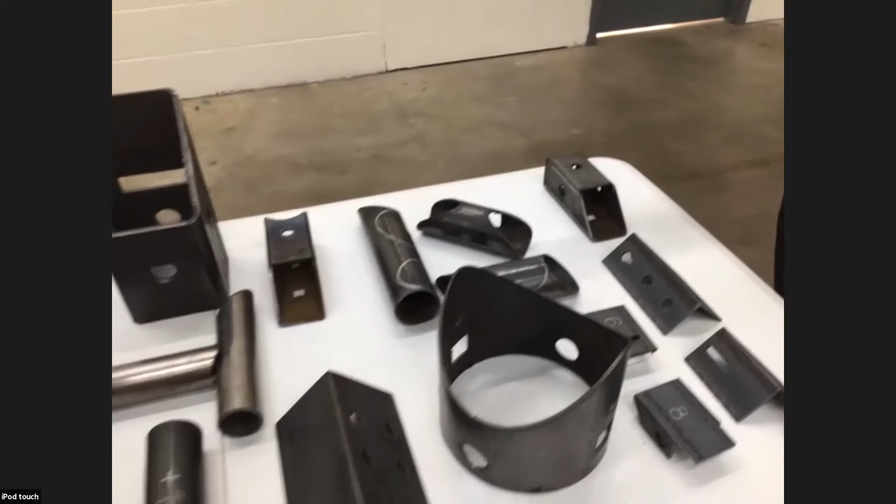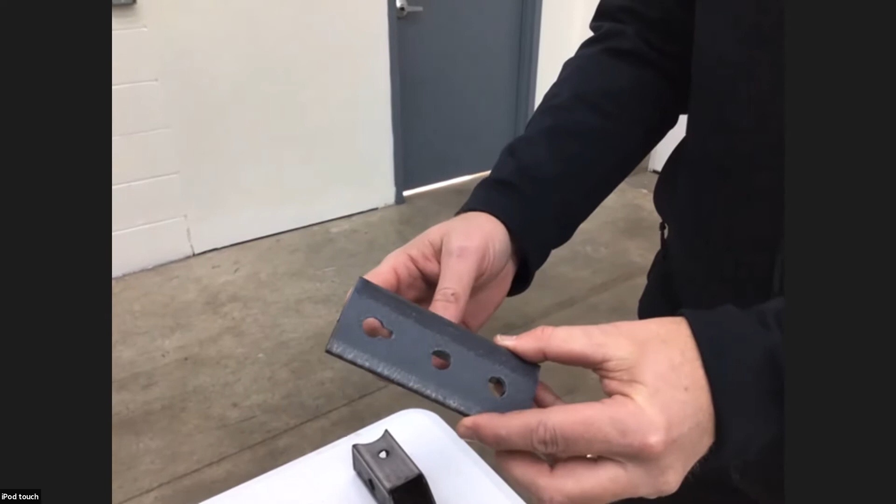So certainly the sizes, like Bill mentioned, we can do square, round, rectangle. You can see here if you need to cut slots, holes, miters, copes, all that's possible on the Dragon. Not a problem to be able to do. We've recently, a year ago, added angle and channel capabilities. So on the angle and channel, you can do any angle and channel that is going to be 4x4. It can fit into a 4x4 box, I guess, is the easiest way to put it.

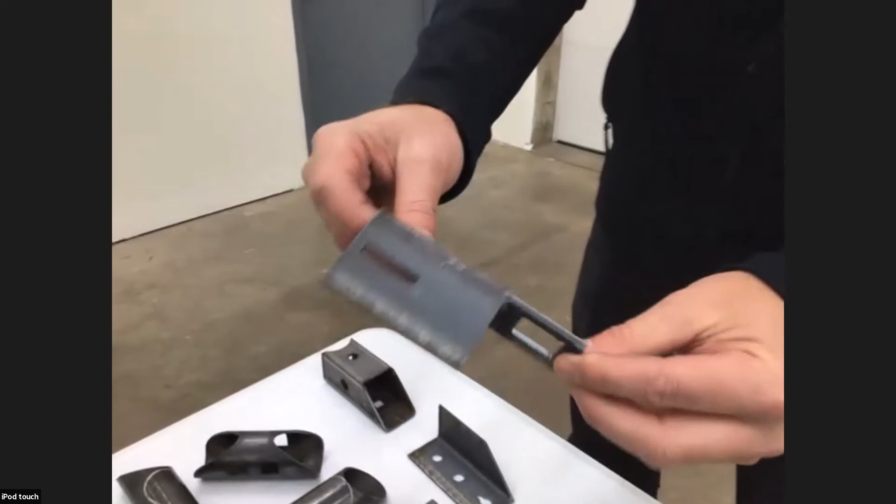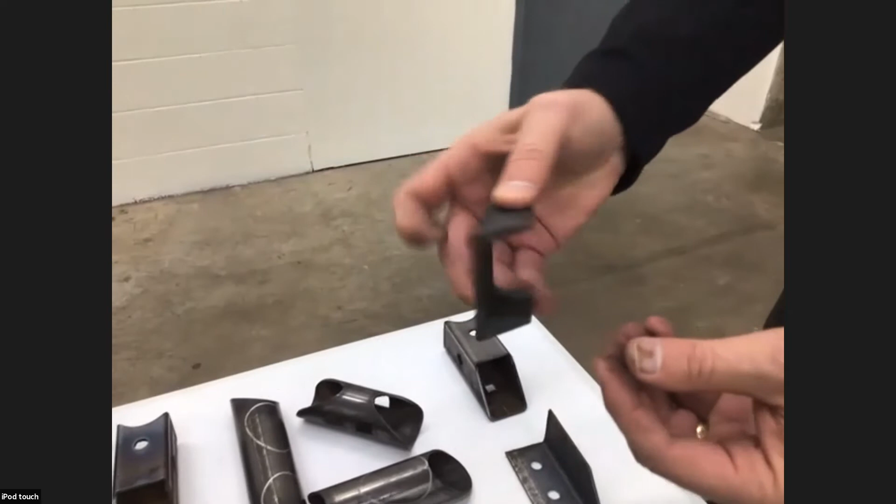So you can cut angles, again, holes, slots, a couple different examples here of what we've done on our Dragon machine here. Here's an example of some channel that you can see. So again, any channel or angle that fits in a 4x4 box, we can process through the Dragon. On the round, we can go up to a 6-inch round and down to basically a 3/4 inch round are the parameters. So there again, you can see the plasma cutting on an example of a larger piece.

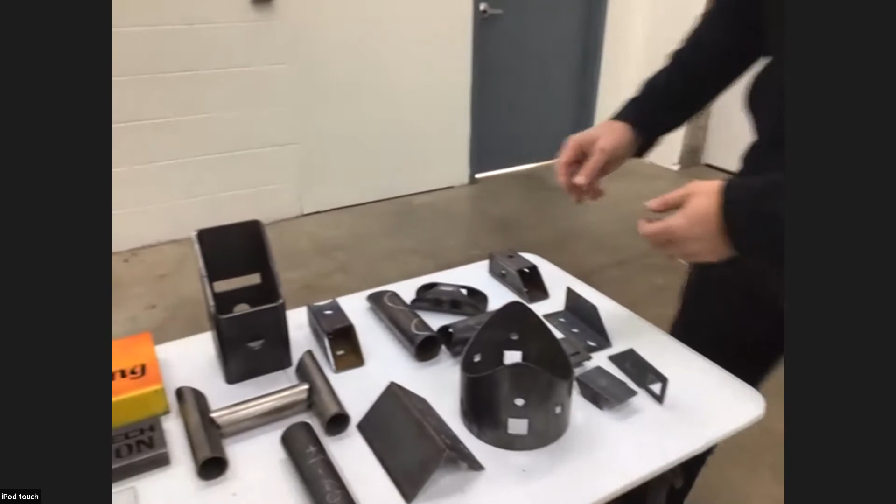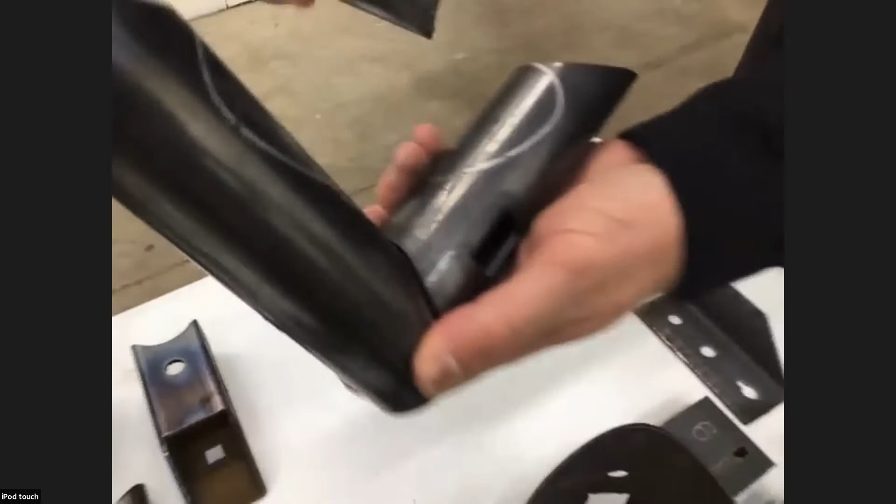One of the also neat features we do is we can draw the weldment fit-ups on a tube. So if you have an assembly and you want to know where that fits up, we've got a marker station and an engraver station. Either way, that allows you to put that together. So here's an example of if you had someone out there needing to weld this together, all those parts are nicely drawn out on where that fits up.

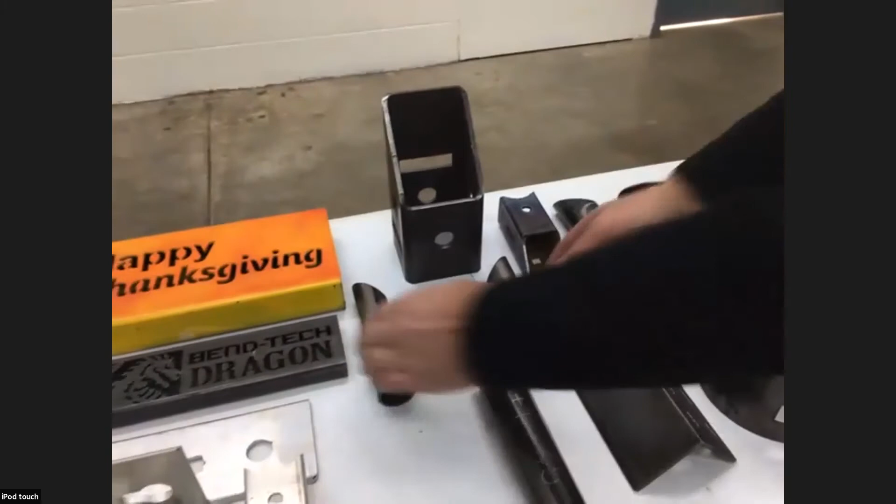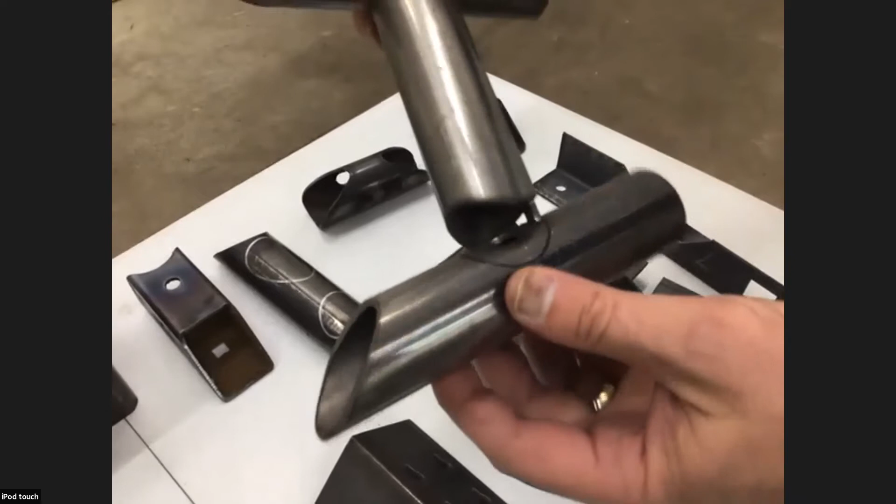And there's also something we do called slot and tab. So not only if you want to just mark, but say you want to really fixture in where that lands, we can do a tab and a slot. So your weld fitment then is just that easy. You put that together, you know exactly where everything should land. So it saves you a ton of time on the setup of these parts and pieces. And if you guys have put together handrail and other assemblies, you know what I'm talking about.

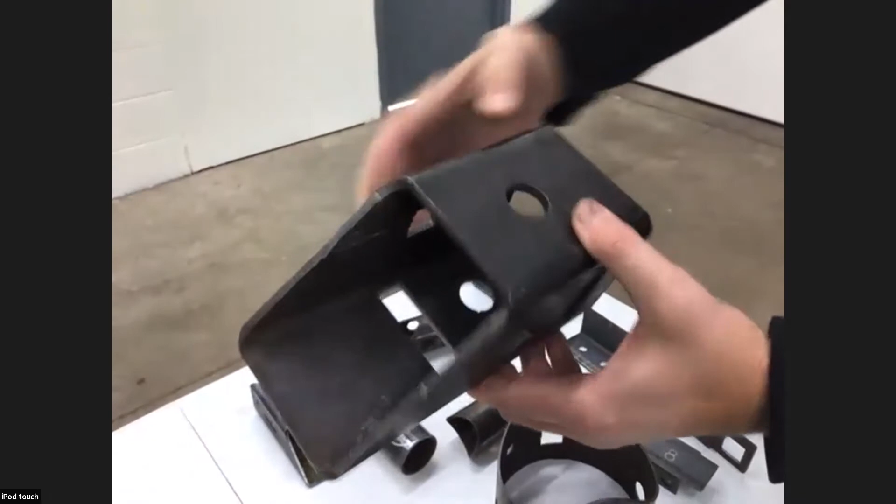Here's an example of some 4x4. So in our square, we can do up to 4x4 in material size. And again, miter cuts, holes, any kind of geometry you want to cut out, not a problem for the Dragon.

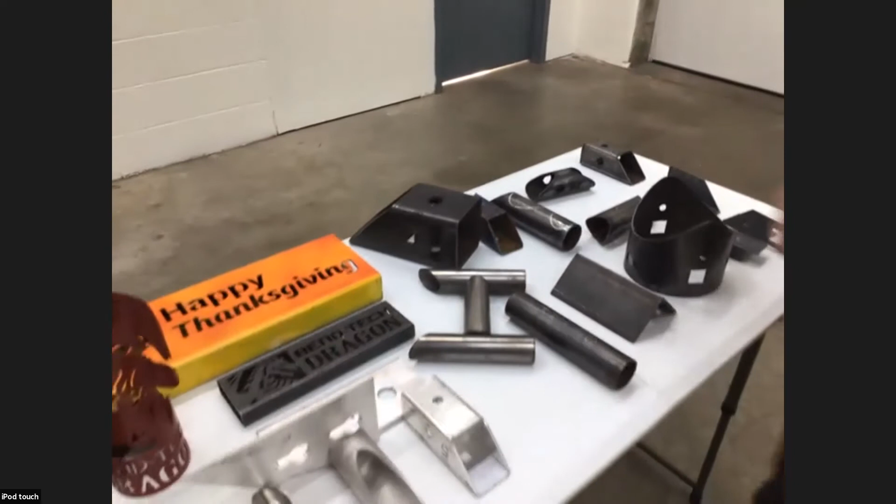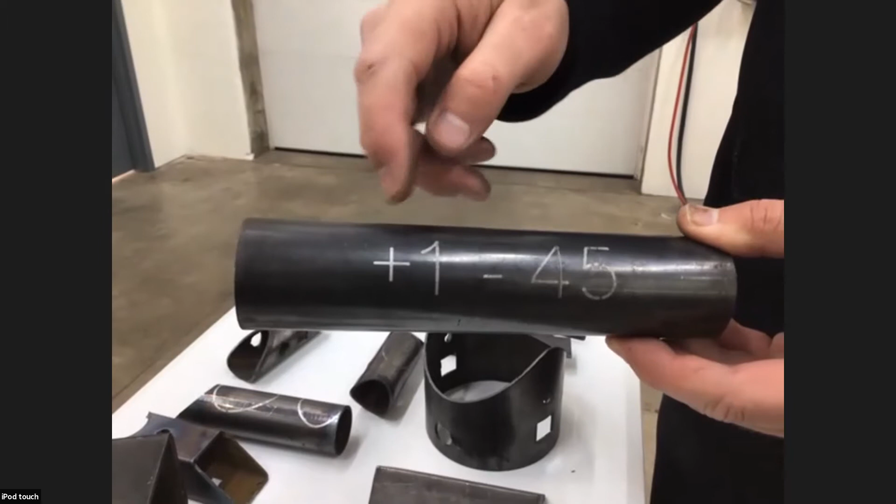We also, I want to talk about one thing we do. We've been doing tube software for over 20 years. And one thing we can do is calibrate to your bender. So if you're bending tube, you can bring a bent piece of tubing into our software, and then our machine can mark the bend location here and tell you bend 1 is 45 degrees, and can also calculate spring back.

So when you take a piece of tubing, you can get all the cutting done on it, holes, again, miters, copes. The operator then can take that piece of tubing, line it up in your bender, calibrate it exclusively to your bender, and go ahead and bend that piece of tubing. So that's something pretty unique to our machine compared to anything else in the marketplace.

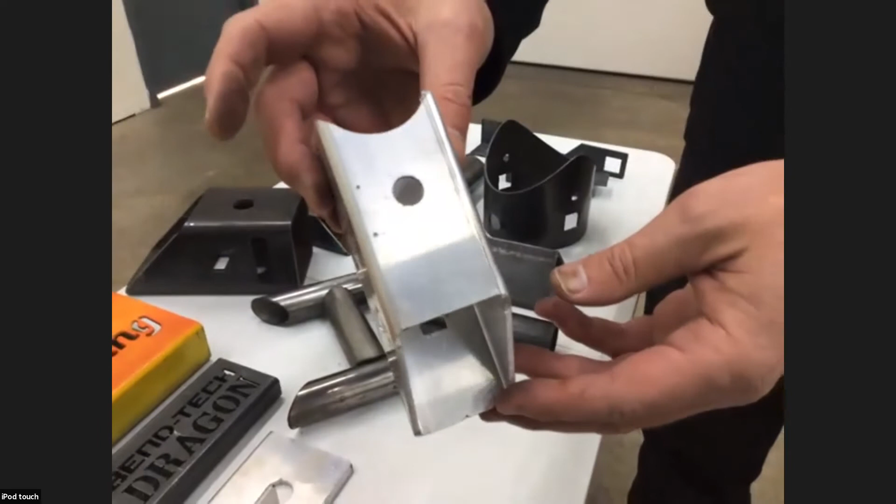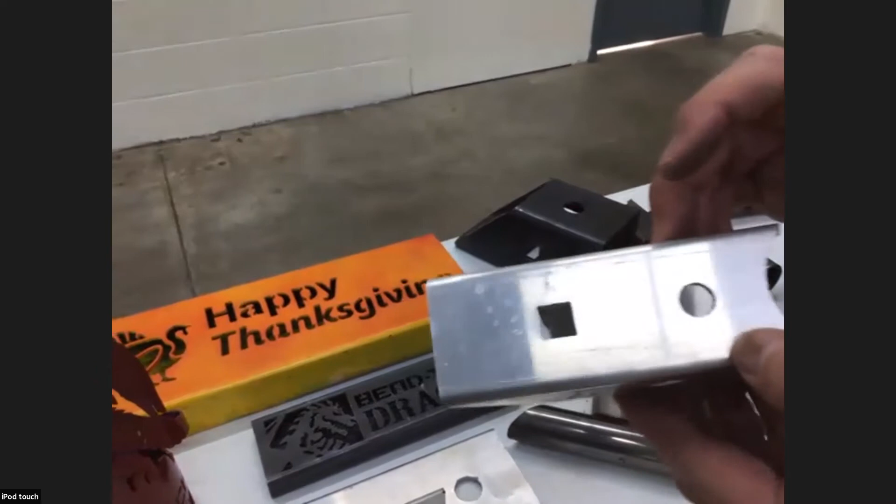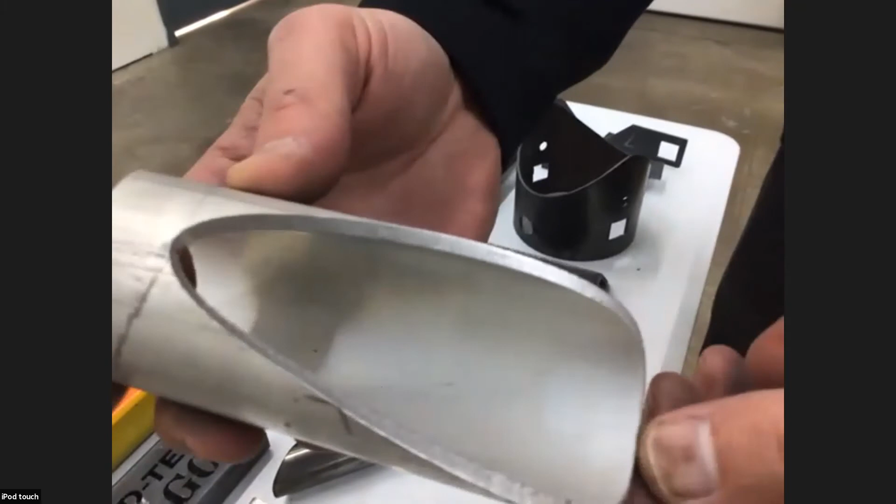We also can do some other things besides mild steel with our machine. We do have a coolant system, and this allows us to cut aluminum without it getting too hot, so you can get some nice cuts by running coolant through the tube, just recirculating it, and then being able to plasma cut, where if you didn't do that, you would just not get this nice edge. You'd have issues inside with dross, and it would not be very plasma friendly.

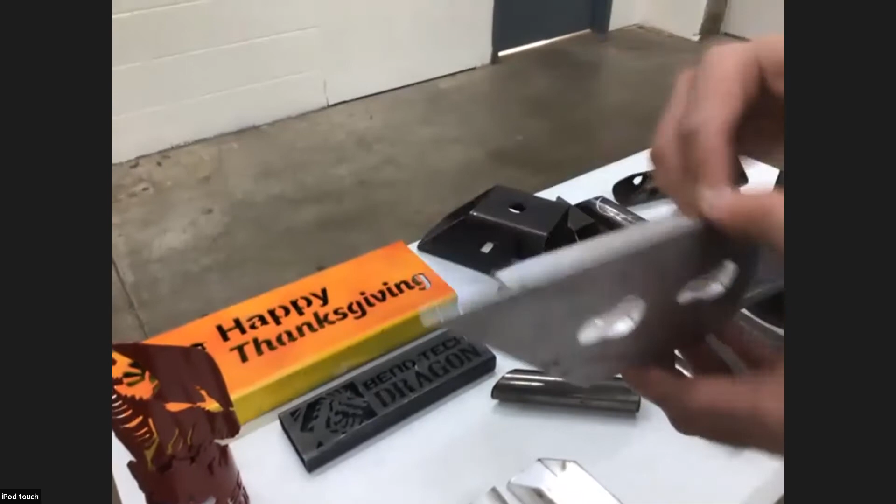Here's a piece of angle. Obviously, we don't use coolant for that, but the plasma is not hitting the backside, so that shows you some things on aluminum angle that we do.

And then another popular thing is stainless. So again, with running a coolant through stainless, we're able to plasma cut that and get a very nice result. You're still going to get a little bit of a plasma edge. If you run nitrogen, that does help that as well. But we do have quite a few Dragon customers cutting stainless.

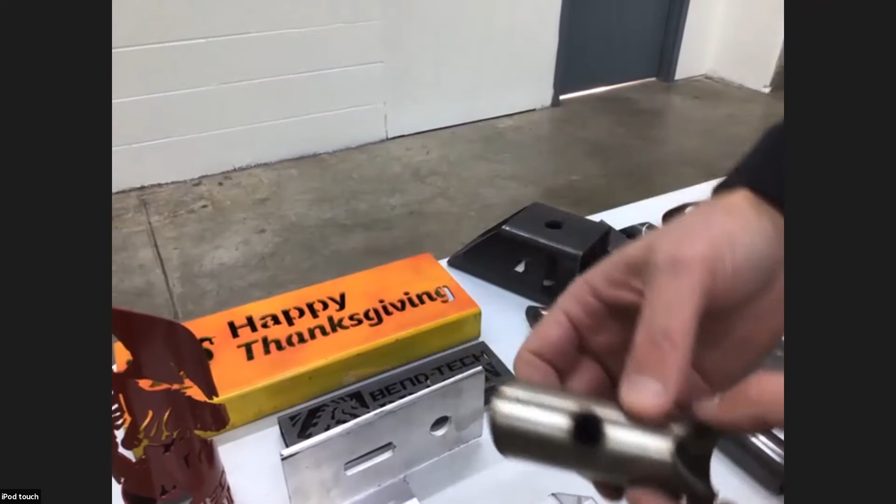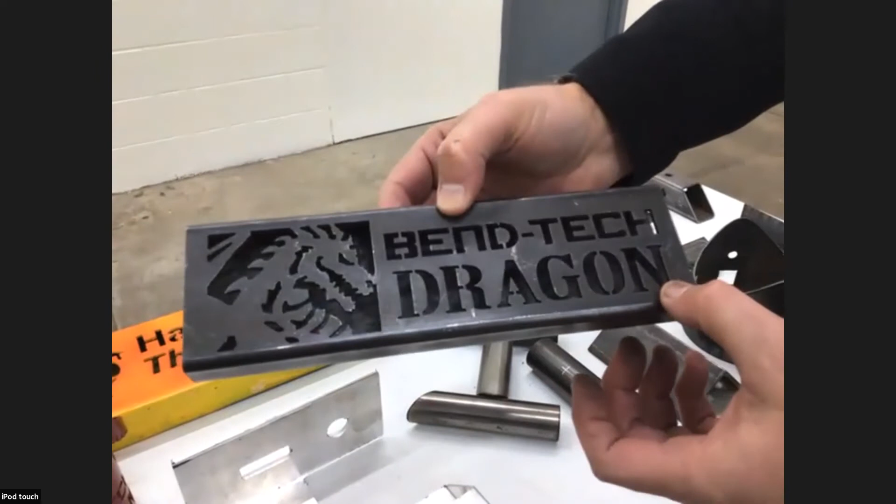And then for fun, we do have a marketing department that likes to have a little fun once in a while. So you can take a DXF design and cut this out with our Dragon machine. So we've done some different examples here. We've cut a tube and unfolded it, which is kind of a fun piece we take to trade shows.

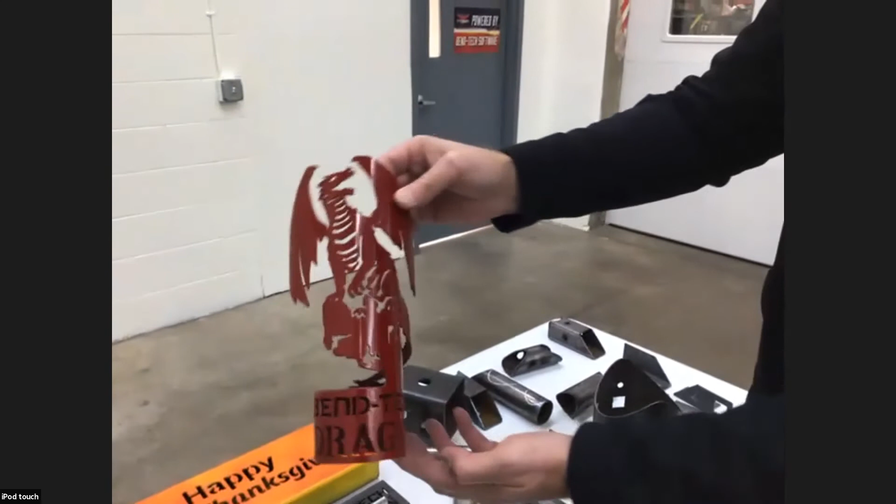And because it's soon to be Thanksgiving, we thought we'd show you, happy Thanksgiving to everybody a little bit early. This was all cut out on the Dragon machine as well. So that kind of gives you an idea of what we can process with the machine.

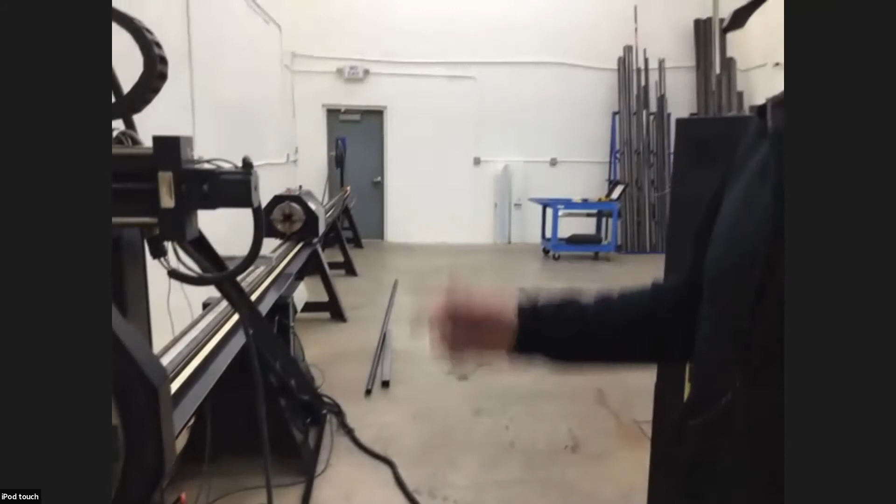What I'd like to do is go over the machine, kind of show you the components, how it works, and talk a little bit about that. So in our shop here, we have a water tray system set up. This is for our coolant system, and there's 3 5-foot trays that go out. So if you have longer parts, it's going to capture the water, come down into a sump, and then go back to a hose reel that's retractable, and that's your system of recirculating water through the piece if you want to use the water system.

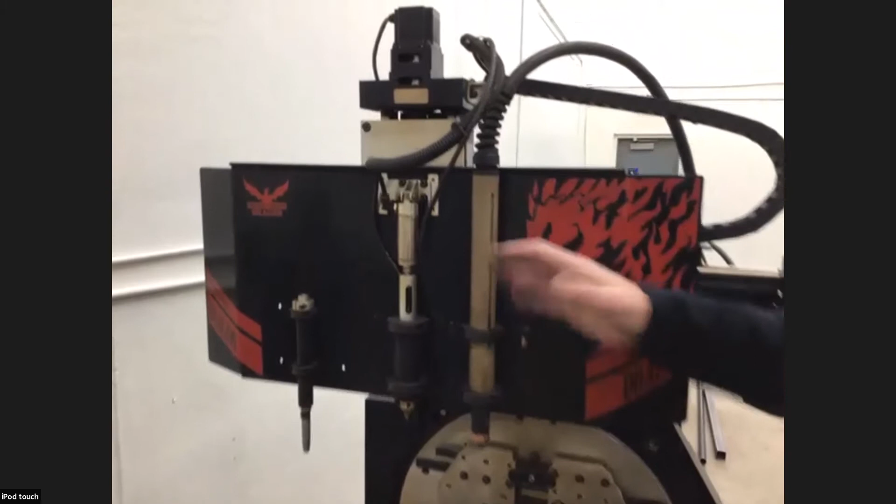But let's talk about our head. We have Thomson actuators that go up and down, left and right, and we have, again, a marker station. So you can put a marker in here, again, mark bend locations, part numbers. We also have an air engraver here, and this allows you to mark the tube however you need. If you want part names, numbers, or bend locations, just another way to mark.

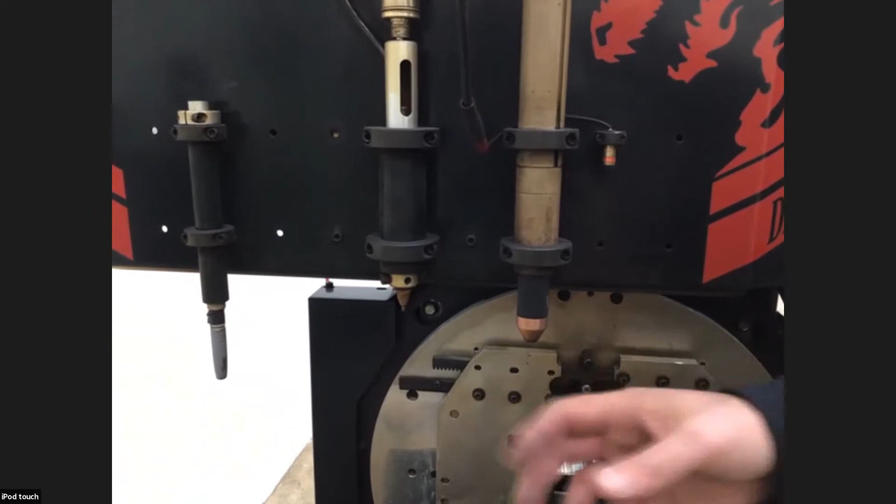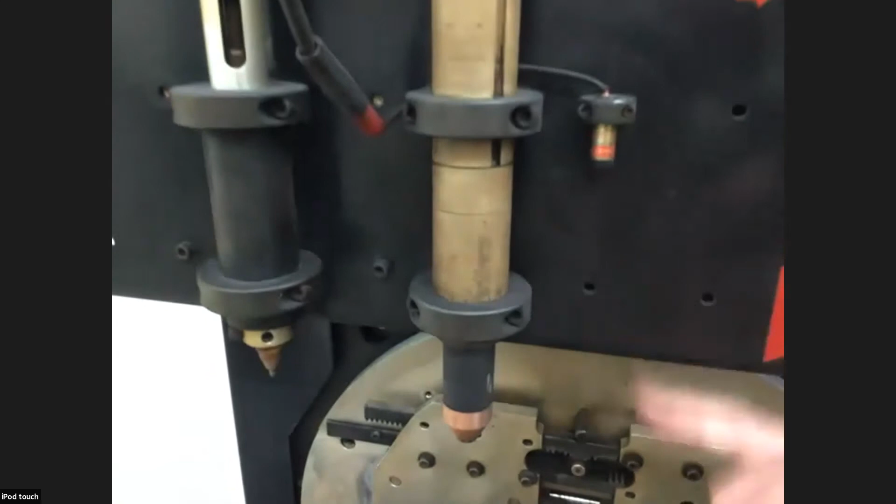Of course, we have our mechanized plasma torch here. We do recommend Hypertherm, but any mechanized plasma torch will work with our system, and we can provide a Hypertherm. Typically, we would recommend for an average steel shop probably a PowerMax 65. If you're doing some heavier duty stainless or aluminum, you may want to jump to an 85, but the 65 is kind of our workhorse. And then we also have a little laser lineup light here, and this allows the operator to see where the end of the tube needs to be when they load the tube up.

So our front gate here, we'll talk just a minute about this. This is 2 sets of rollers here, left and right and up and down. And the operator, when they change material, just needs to change it 1 time per size of material. And our rollers can accommodate all those different types of tubing and angle and channel that we showed you on here.

The angle and channel upgrade to the machine is actually a gear here and a motor, and this actually rotates the gate with the chuck as the material is being processed through. And that eliminates any spring that an angle or channel might have compared to a tube. So that is one of the machine differences. Our standard machine that does square, round, and rectangle does not have a motorized gate. So just wanted to point that out.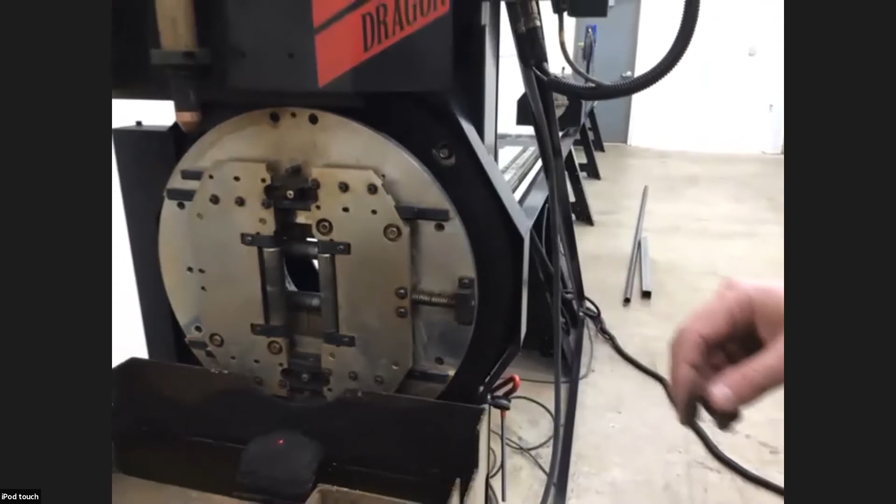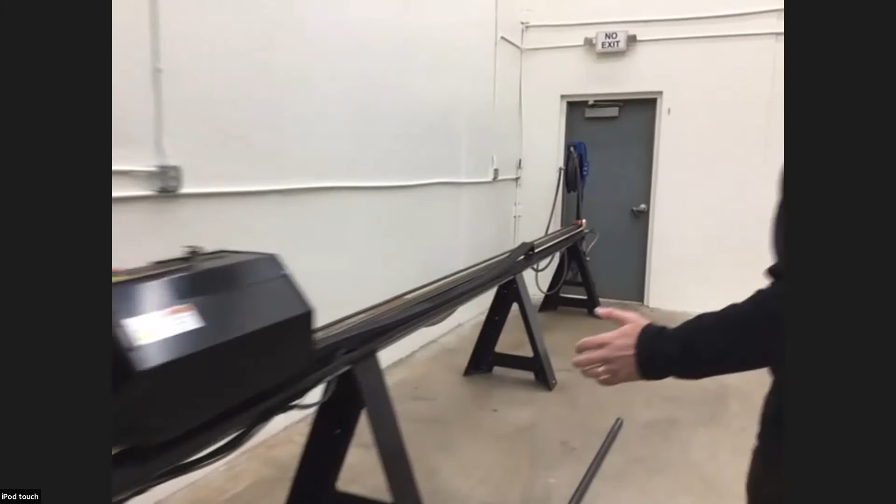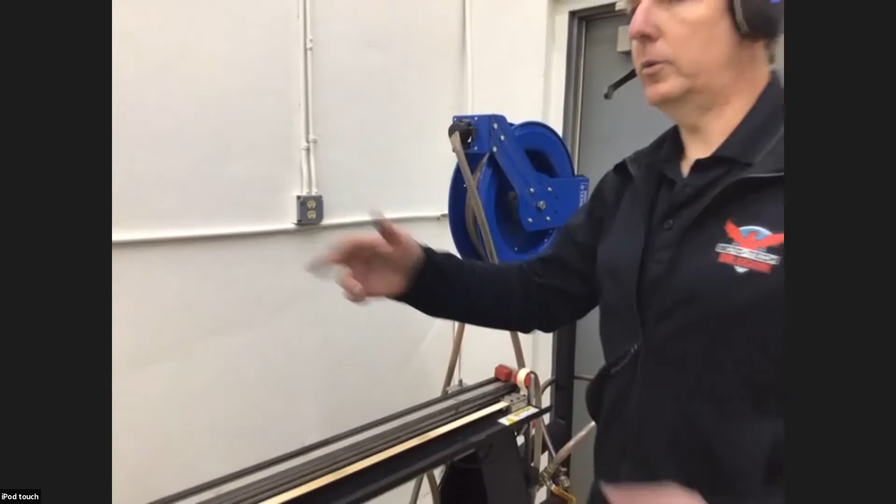So that's basically the head of the machine. We'll take you to the back here. The machine is a full 24-foot bed length, so you can put a full 24-foot tube on the machine and load it up. This is our hose reel. Again, if you use the water system, this is just a retractable system that's going to go into a plug in the end of the tube, and you're just recirculating the water through the machine.

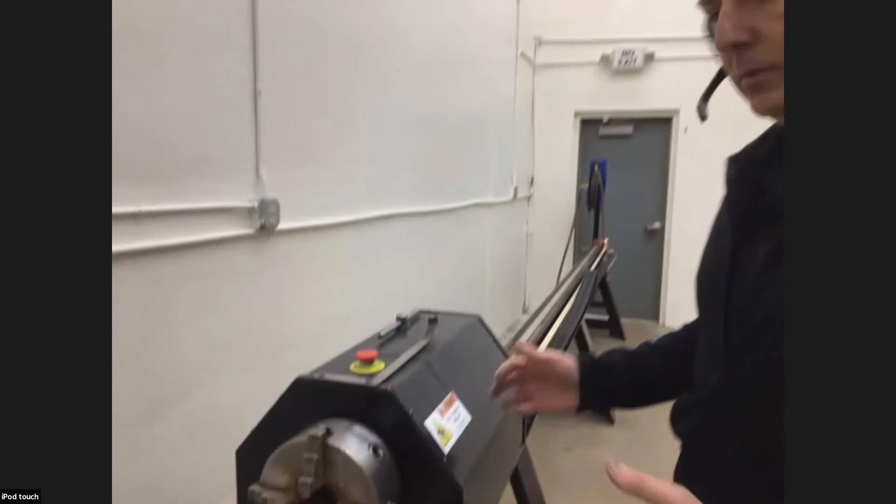If we come up here to the chuck trolley, what we have here is a 4-jaw chuck, and this allows you again to chuck in any of those materials as the operator needs to load it. This is a belt drive system to move the material in and out as it's being processed. And again, this is a full CNC run through our Dragon software. We have our control box down here that is manufactured by us.

One of the things I want to point out, this is completely made in the US, including our software, which we've done for 20 years. So everything gets assembled here, put together, calibrated, and then shipped to our customers.

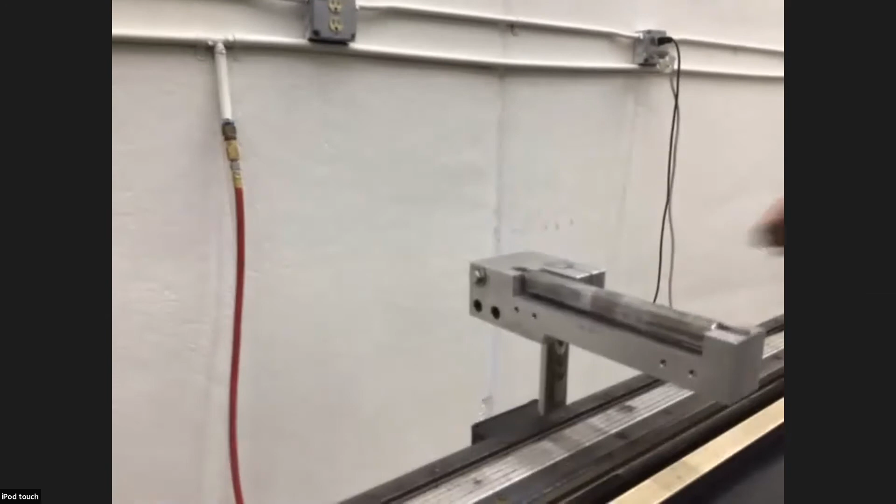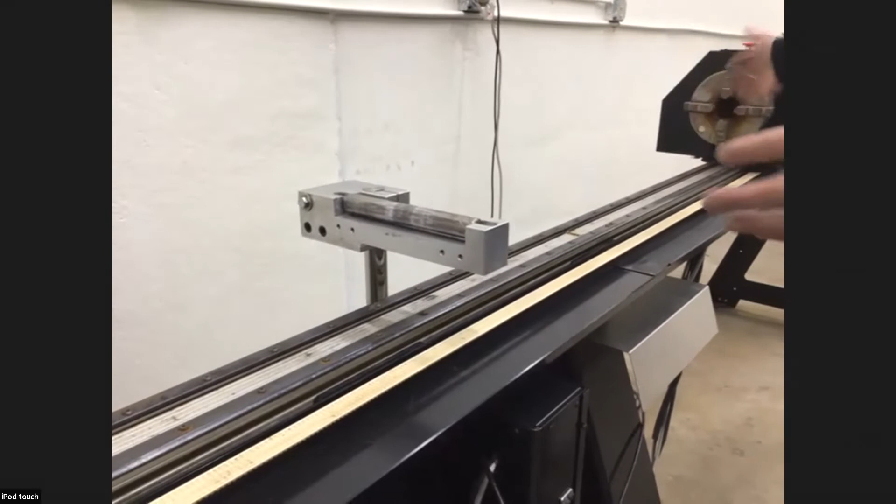Right here, we have a lifter station about 6 feet back from the head of the machine. So if you do have a full 24-foot stick, and maybe it's thinner wall, so it's going to sag a little bit from the chuck to the front gate, this lifter station will come up to the correct height. The operator then will load the material, and this keeps the material going straight through the gate to make sure our cuts are as accurate as possible. We can hold a plus or minus 10 thousandths on our machine when everything is dialed in.

Now, if you're processing square or rectangle, this lifter is going to go up and down as that gets rotated to follow the material. Obviously, with round, it's just going to stay there. When the chuck trolley comes close enough, it's going to automatically swing out of the way, and you'll finish processing your tubes on that. That's basically it for the machine.

What I'd like to do is hand this over to my tech, Jared, who will be screen sharing the BendTech software, and we will go through a little bit of our software capabilities. When you buy a machine, you get a full software package. You can draw in BendTech. You can import CAD files into BendTech. We do have a direct interface with Tekla and SDS2. And any other CAD, we can bring in step models, so we can bring in single parts or assemblies into our software.

And then we also have a great feature: you can design a single part or assembly in BendTech. So Jared's going to show you a couple of the things in our software, walk you through how easy it is getting the part nested. We're actually going to load a piece of material, cut a sample for you guys, and then go from there. So Jared, I will have you take it over on the software side.

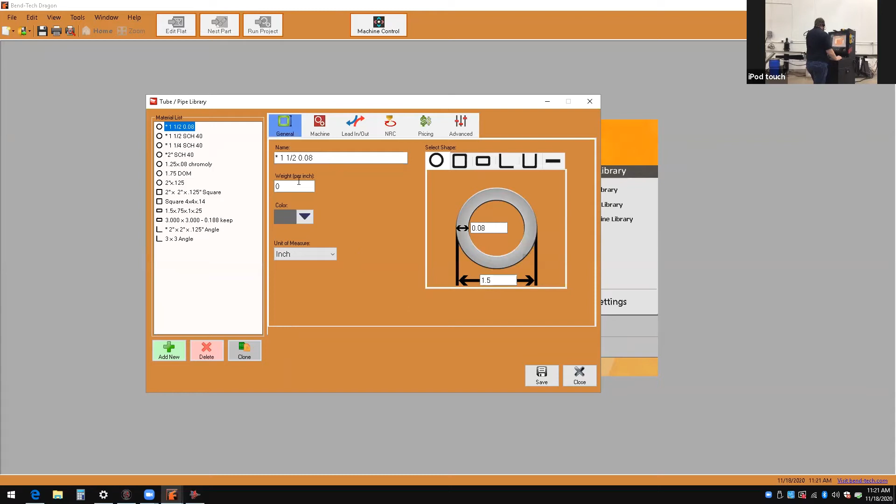You'll essentially create your material library from anything that you use frequently or anything that you have on hand. Other than the name, the only requirements are your material wall thickness and the OD of material. And then it has other settings such as the pierce height and your cutting height. And it also has your feed rate of how fast you're going to move with the machine. So once you have your materials set up, I'll just show you the straight part here.

So right here would be a part name, if you have a number that you're applying to a part or anything like that. So I'll just go with P23. And then right here you're looking at your tube length, so that's meaning the length of the part that you're actually trying to cut. So I'll go with 6 inches for that.

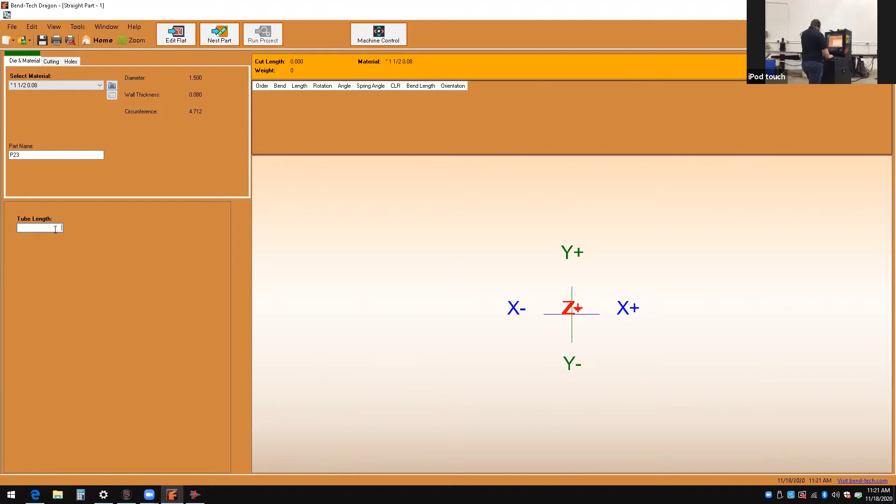The second tab up here is going to be cutting. That's meaning any end cuts that it's applying. So if I hit add the first time, it's going to automatically do a cope. Second time, it'll do the same to the opposite end. So I have a cope set to 90 degrees on either end of this material. To change any of that, like between cope and notch, I can select that and go back and forth between a cope and a miter. And then same with the other here.

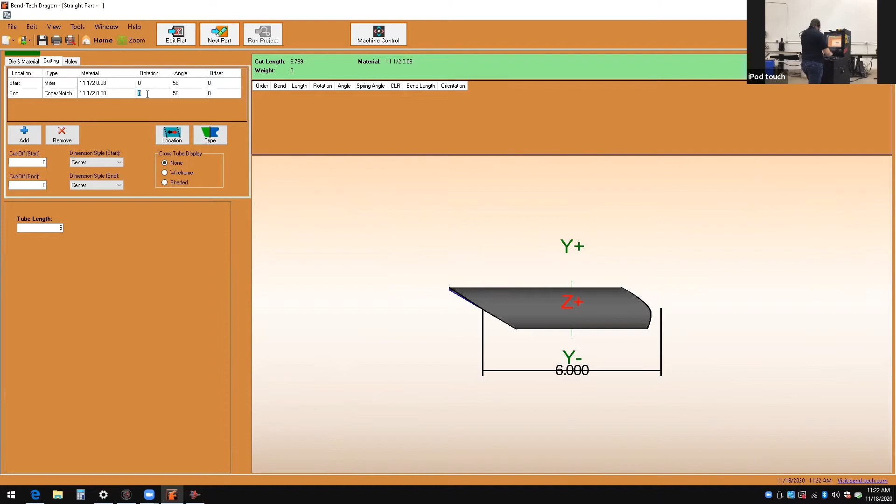If I want to change the rotation, I can click on that and say I need a 58-degree angle rather than a 30-degree or a 90-degree angle. Same with the copes. If it's not in the correct rotation, I would change that and say this needs to be 180 degrees rotated from the other, and that would be the cope on either end 58 degrees. If I want to view that, I can click on this wireframe or this shaded display, and that'll show me the actual fit up of those pieces.

The dimension style that we use as a default is to centerline. So centerline of whatever adjoining piece that you're using; you have the ability to change that right here. So you can go between center, you can do inside of cut or outside of cut. So overall part length or center line or inside of cut length, so not including the copes. And that's purely based on whatever the shop uses as their dimension style for their prints.

If it's the case where the ends are not coping to the same size material, I can go up here to this material drop down and choose a different size. So if my 1.5 inches was going to cope to 1.25 inches rather than 1.5 inches, I can change that so that it fits that material that it's coping to rather than coping to the exact size that you're using. And you also have the ability to do a custom profile as well. So if it's a material that you don't have in your material library, you would just set those material parameters, and then you would be able to cut out that piece against the other size that you're using.

The offset is just for cuts that are not on center. So if I take one of these and move them off center 1/2 inch, it'll be an off-centered cope rather than on center.

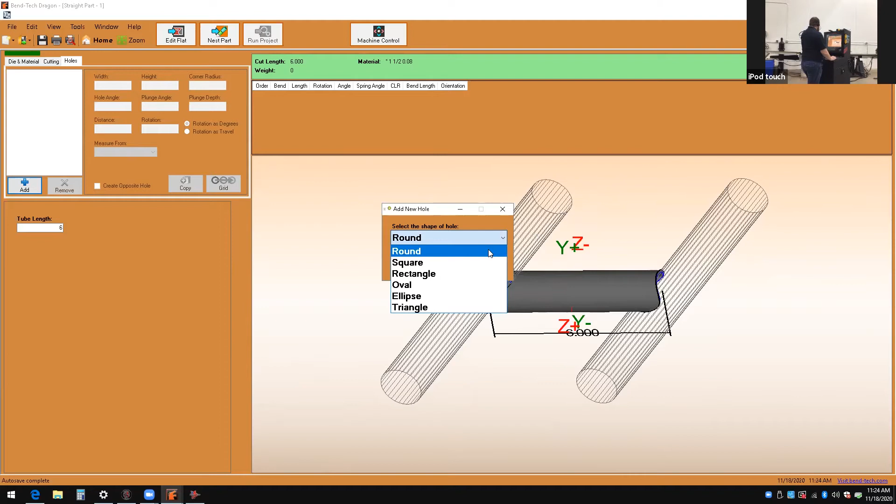Go back there. So the third tab here is going to be your holes. If I hit add, it's going to ask you what shape of hole that you want to do. We have the ability to do a round, square, rectangle, oval, ellipse, and triangle hole. So it's up to you on which hole shape that you want to use. So I'll start with a round hole. Up here you have the width of the hole, so that's going to be your OD, the diameter of your hole, so 1/2 inch. The distance is going to be from your black dimension line that you're seeing here. So to actually contact material, I'm going to go to 1.5 inches.

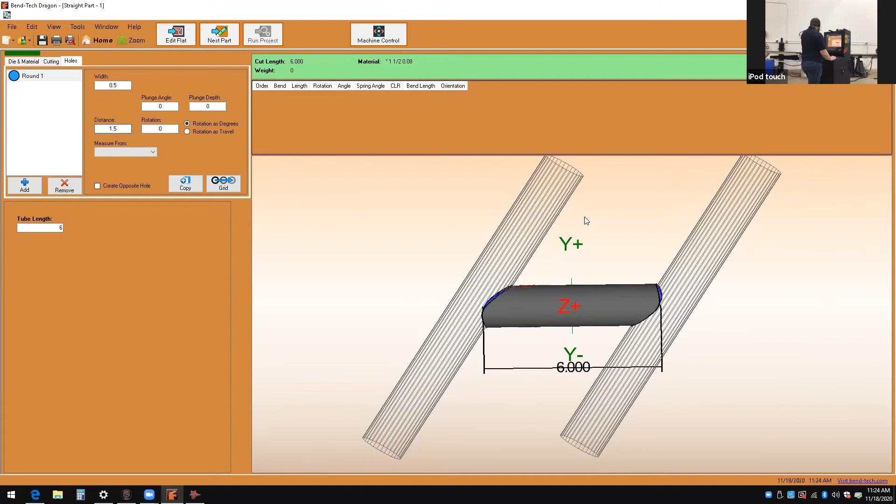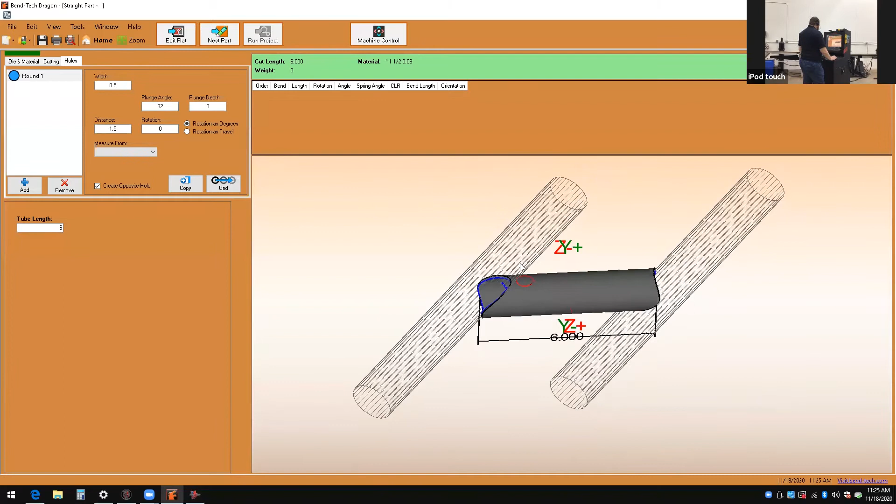And then right here I have a create opposite hole. What that does is it creates a hole 180 degrees from the original. That's an identical hole. If that came in at an angle, the same as my copes are going, I'd go with 32 degrees. And now that's not only going to elongate the one hole so that I would have clearance for a picket or something like that, but it's also going to offset this hole here so that they're not directly below each other, so they're at the same angle as what those copes would be.

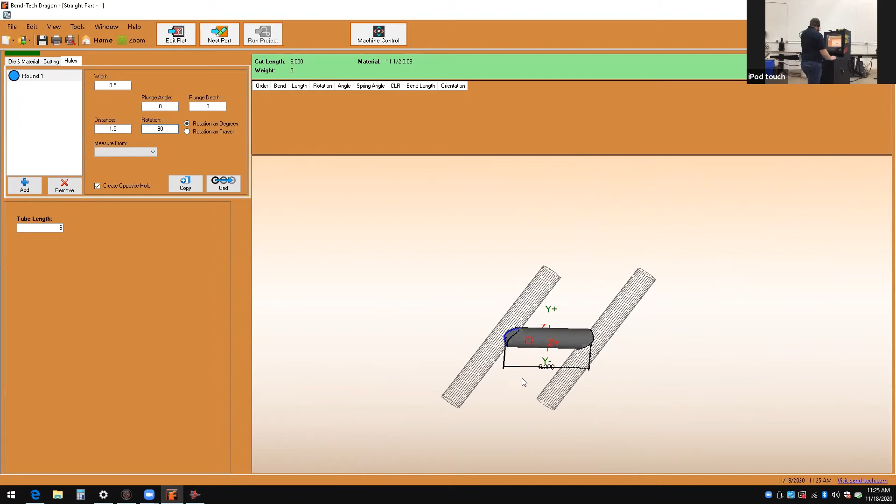And then you can rotate that around as well. So if I choose 90 degrees, it's going to end up on the other side of the material rather than the original side. Default is going to be to measure from the start of your part. You can change that to end of part as well if you'd rather. And then right here you have the ability to copy. So if you choose copy, it's going to be the identical hole.

All you need to change is where that distance from the start of your part or end of your part would be. And then the grid function is going to be how many holes that you're trying to create, and then what's the spacing in between those holes, and it'll go out and space those holes out so that you have that number of holes. So I'll add another hole here just so we have a few more.

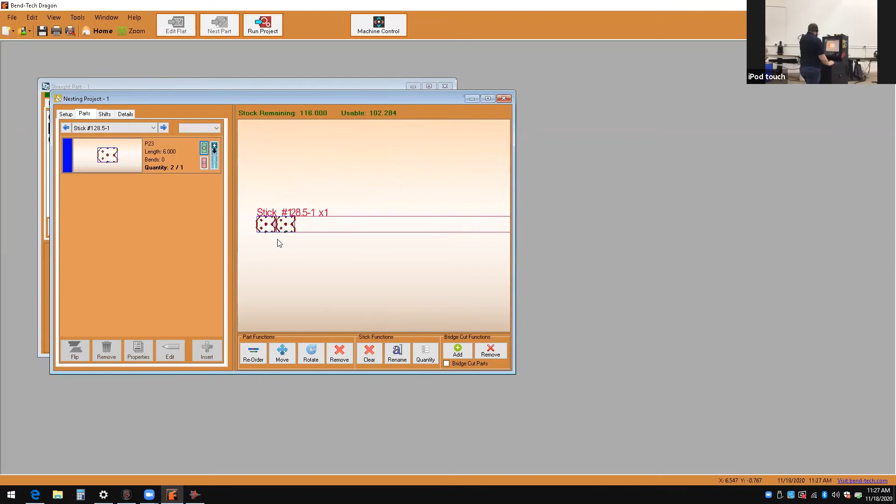So a couple different ways to nest in here. If I go in here, I have a button here that'll just ask you how many do you want to add. Hit enter, and it'll choose that number for you to continue. The blue here is going to be how many. It's going to fill up as many as possible on your stick of material, so that I can cut 17 out of the available material that I have. And then this subtract here is going to be how many do you want to get rid of, and it will take that many away as well.

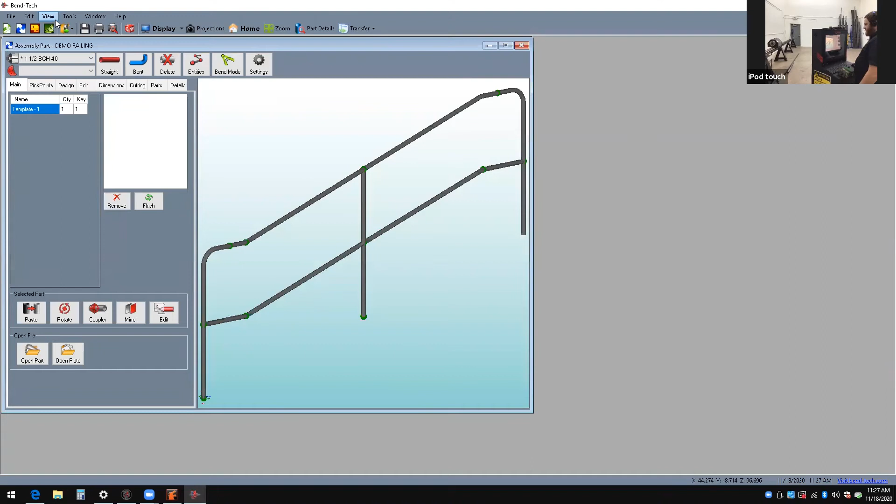So before we actually cut anything, I'm going to show you a couple other software functions. Let's see. So I'll show you the CAD program that we have. So we have a full CAD program as well with a bunch of different options of things that you're able to do. Assembly is the most common one. So that would be drawing of anything that you're trying to do, and it's in a 3D space. There's multiple different templates for things.

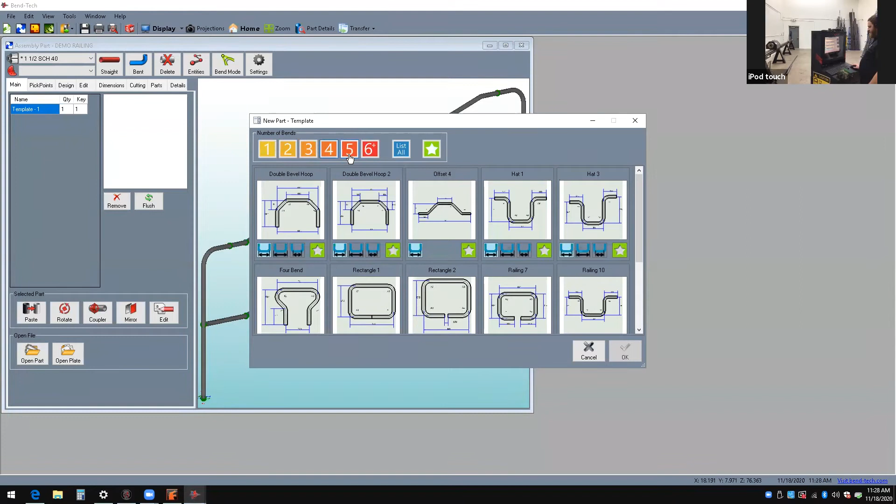So if I select this, this is going to be a number based off of how many bends are on that part, and I can choose between any of those and select what shape of part. So 5 and 6 are going to look similar to some of your handrail parts. 1 and 2 are going to be like small hoops and stuff like that. And then I can draw basically the same as what I did in the CAM side. I can draw individual parts in here. I can use XYZ coordinates as my drawing if that's your preference.

And then I have a couple other different template styles. So AP would be armor pack, which means any bumpers. It has tire carriers, roof racks, rock sliders, and stuff like that. So there are a few in here for like your Razors, or a couple for like a Maverick and stuff like that. The others would be just generic models, and you have the ability to change all of these to fit whatever you're trying to put it on. So you can change dimensions. Let me open one up here for you.

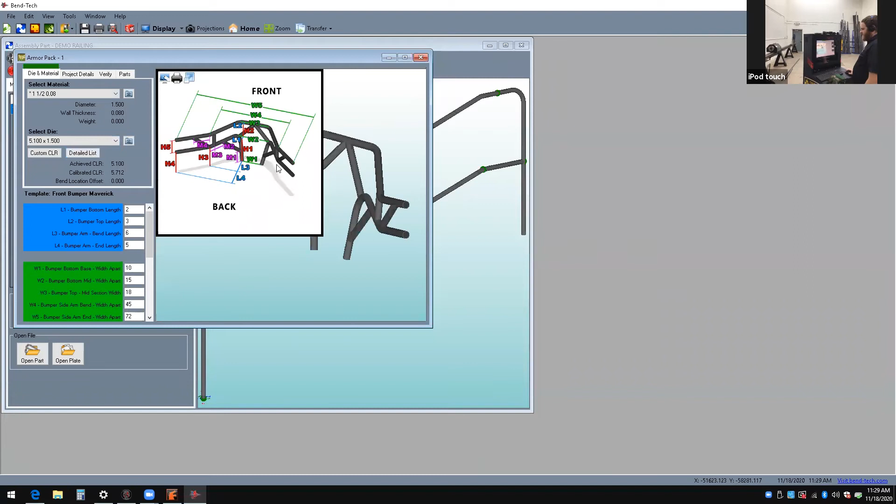So I'd choose material and die. And then right here, as you can see, I can change any of my dimensions to fit whatever I would be trying to put that on. So if it's not a Maverick, but you like the style of it or something like that, you could have the ability to change that and modify it to whatever vehicle. Close that.

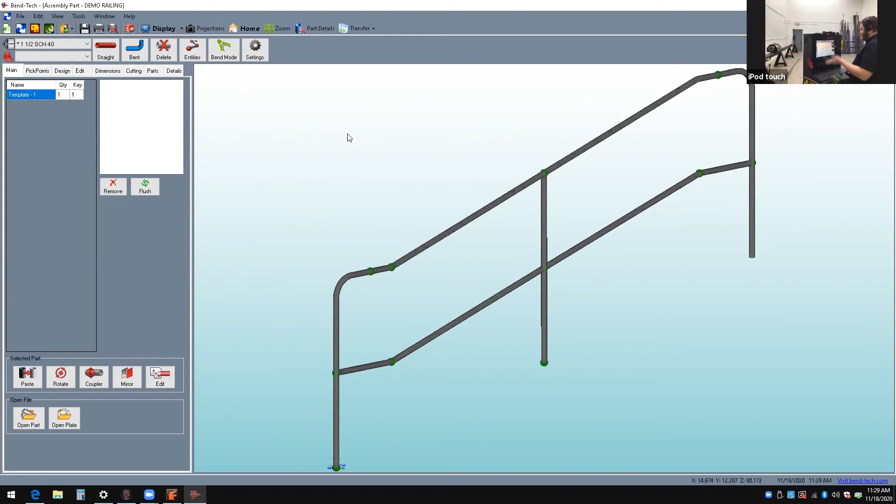Okay. So this is just an assembly that I drew quick. So I'll show you the transfer in between CAD and CAM. So once it's drawn, I would go to transfer and I would choose Dragon CAM. And then that's going to come up in my CAM side of the software. This is all the parts that are included in that. So I would go and nest that, and create a nest out of it. So I will go, as my default is a 240-inch stick.

The parts are all under this parts list. So you have your first, the main bar, and then your mid rails and your posts as well. So the other option for nesting is called auto nest. So if I set this to 0 and I hit that auto nest button, that's going to automatically apply all of those parts to my different lengths, and it's going to fill up the number of sticks that you need to cut it. So we need almost 2 full sticks to be able to cut out all those parts.

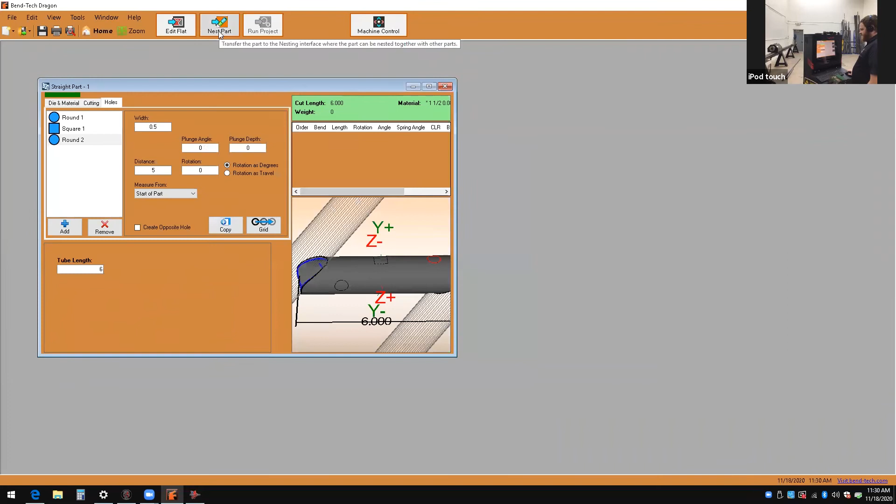So it's going to do that, and if you have too many, say you had 8 sticks listed in there but you only needed 2, it'll retract those to get rid of them, and you don't have to use the 6. So I'll go ahead and make this back into my nest, and then we'll go ahead and cut this out.

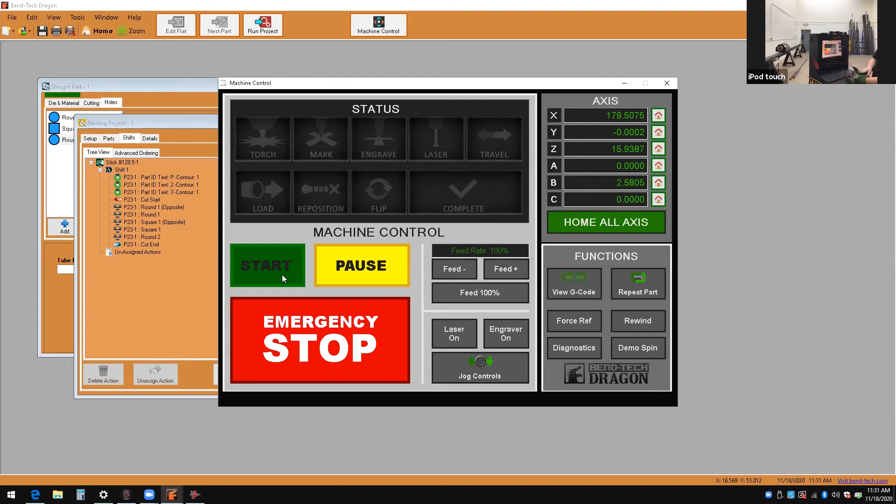And right here, I would just hit run project. That's going to come up with my machine control window. The first time I hit start, it's going to go to my load position. And then the second time you hit start, it continues and cuts that out. So let me stop sharing this quick. Be back. So I'll go ahead and load that piece of material.

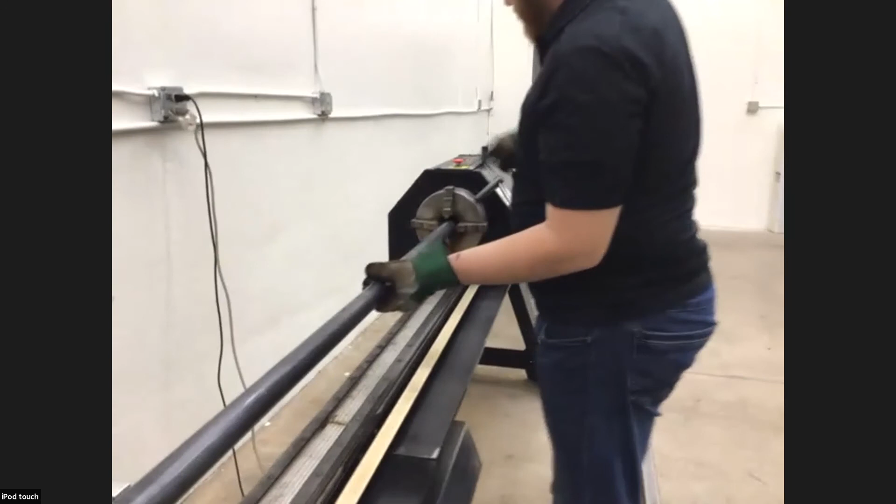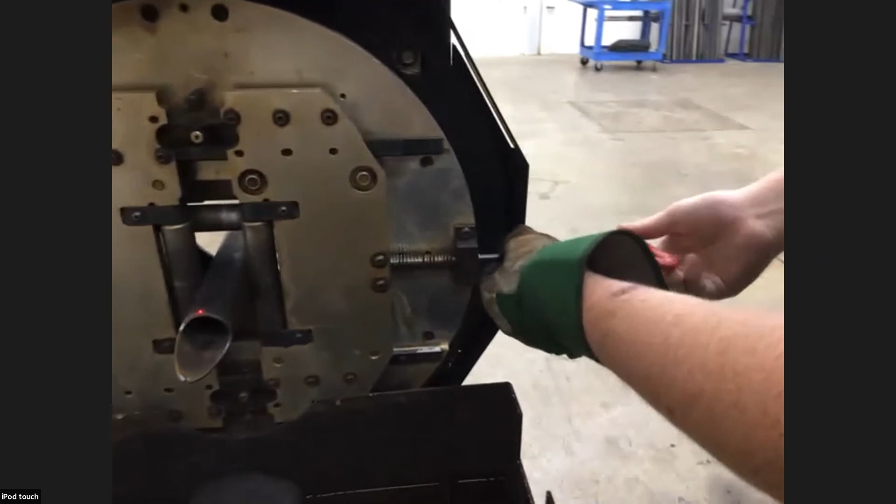So with that in there, you'll have to tighten up your gate as well. So that's just a 1/4 inch Allen hex head. Basically tighten it down until it's touching both sides of material and you're not trying to crank down or squeeze down on it too much.

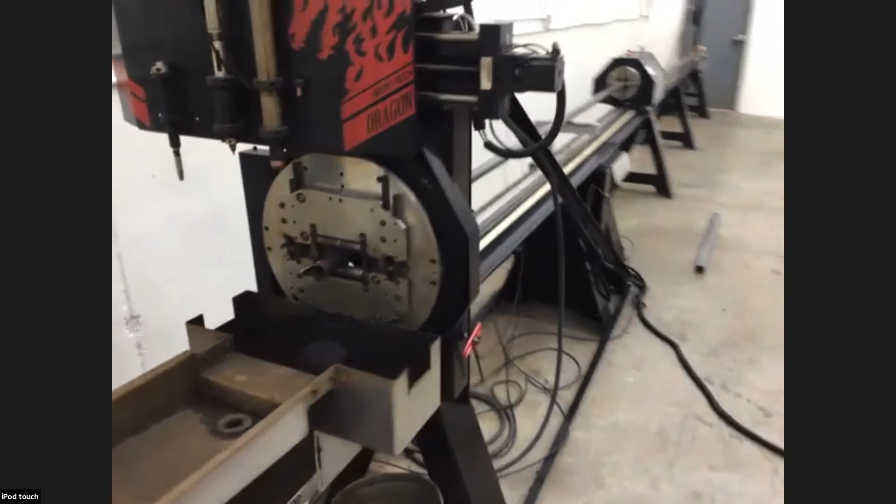Then in order to reach the other side, I need to rotate that. Like Ron said, there's only 2 sides, so I would close down on this one. And once you set a material, it's good until you need to change material size too, just to reiterate that. So, let me check the temperature real quick.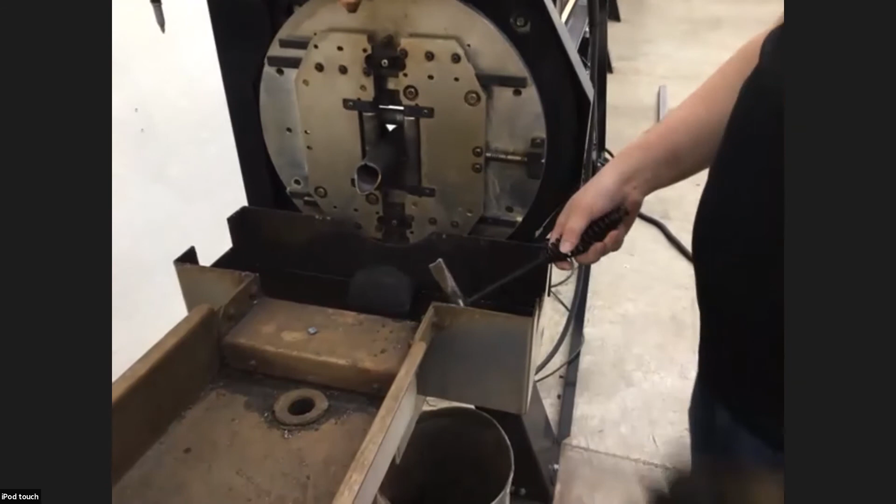And with the coolant system that you're using, you really don't have to worry about touching it. It's pretty cold to the touch when you're using that. Without that, we usually keep a little bit of water in the bottom of that bin so that parts can be cooled off.

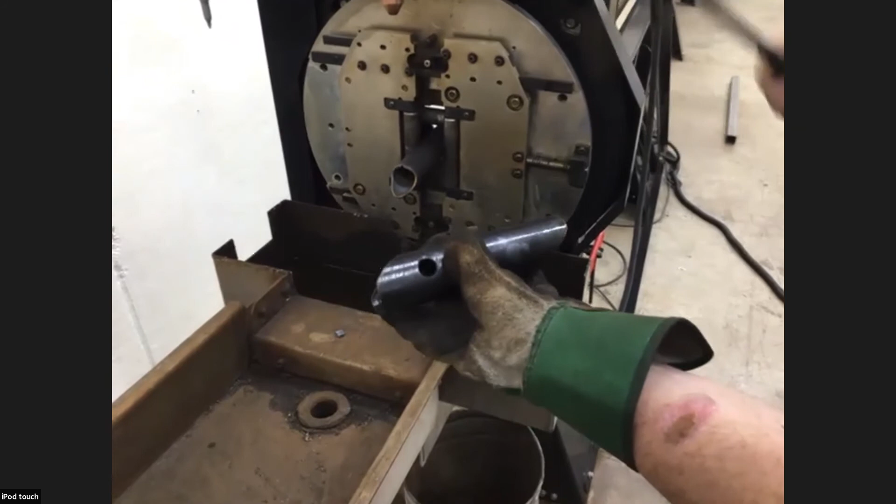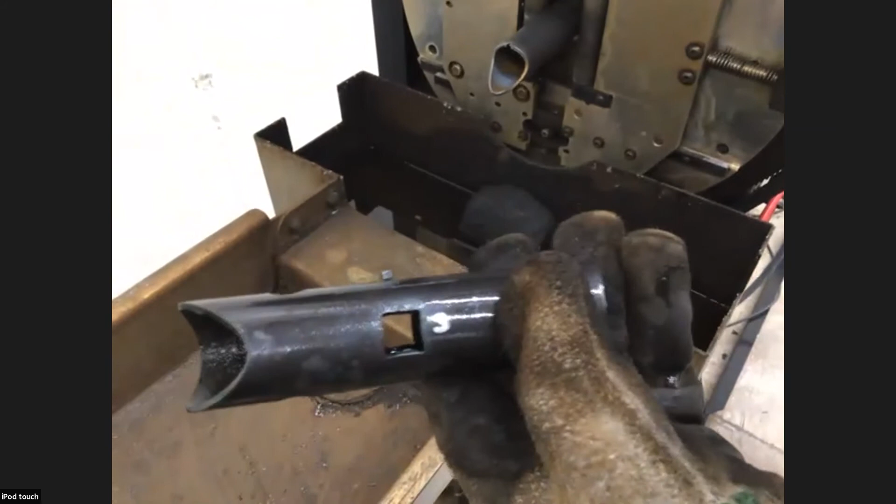So your two copes right there, both 58 degrees opposite of each other. And then you have your pass-through circle hole there. And then you have the pass-through square hole right there with, that's a number 3, so the height of the letter is a 1/4 inch right there without changing it. And then you also have that last hole that we did right there.

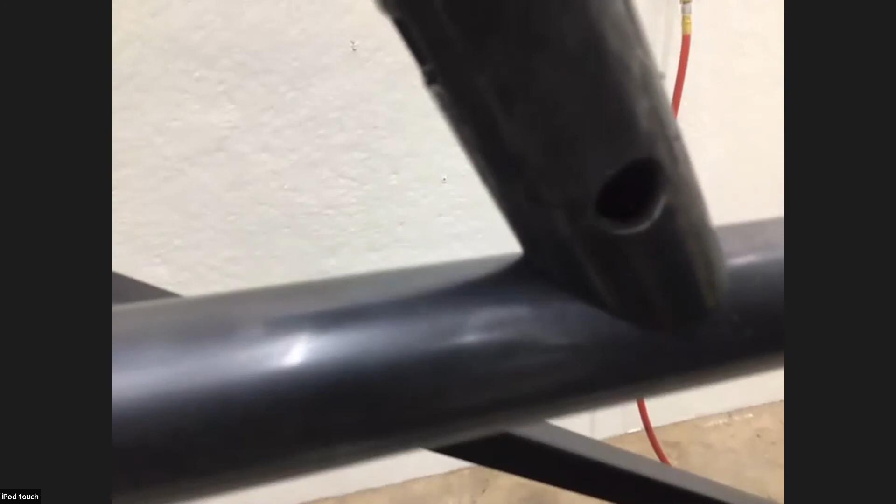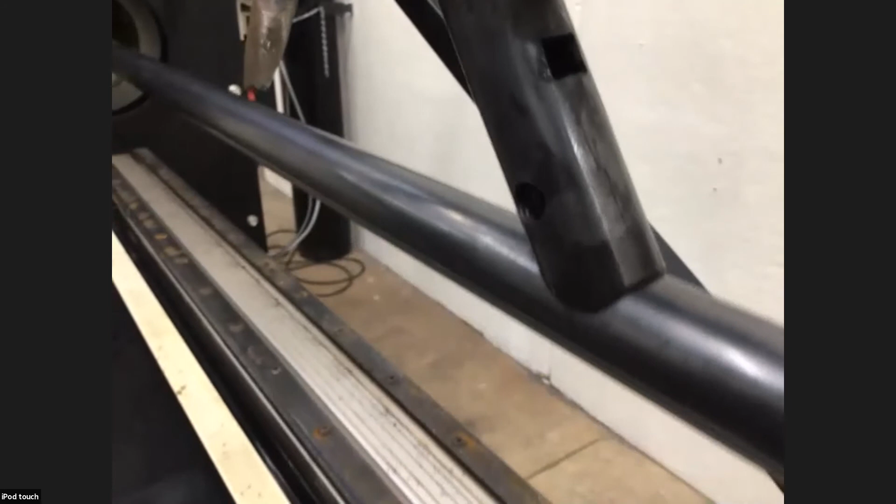And if you want to see how that fits up, typically just set it on here. So that would be the fit up that you're looking at. And the software does normalize a cope. So if you guys get a design in a CAD and it's got a knifed edge, our software looks at the thickness of the material and adjusts for that automatically.

So, but yeah, I think that pretty much wraps up what we had to say initially. So I will hand this back over to Mid-Atlantic and go from there.

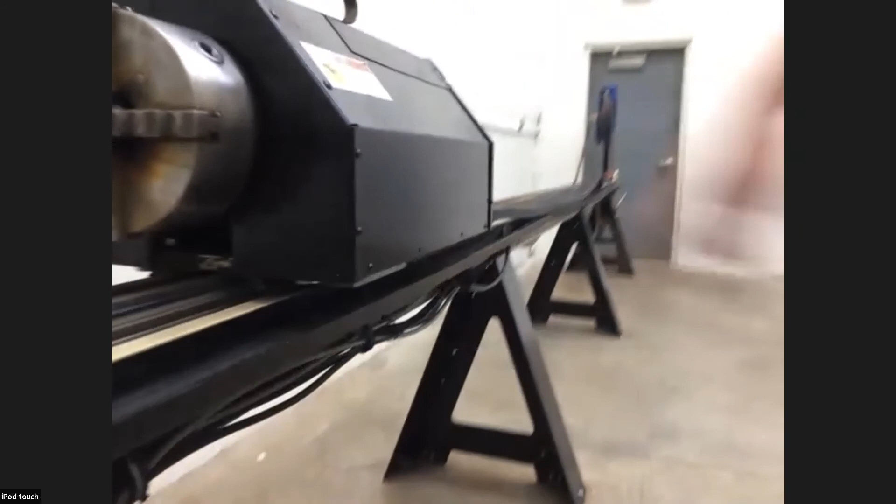If you want to take a look at it, that belt is set right here. So it goes up into that chuck trolley. There's 2 idler rollers, and then it rolls around a gear that's attached to an X motor that drives back and forth.

Thank you so much. The next question we have is: is the level support station automated in a post processor, or is that a function that must be manually programmed? So we calibrate all the machines here. So anything that you add to that material library is pre-programmed in there. So you should not have to adjust that lifter pretty much at all.

There may be some cases where you have minor adjustments to height, or if the lifter's coming up too far, things like that, that you want to adjust. But for the most part, it is calibrated and should function to every material that you add to your library. Yeah, when you change materials, it'll know what height it is. So if you're going from 6-inch tube to 2-inch, it'll automatically make that adjustment.

Next question we have: is there a minimum part length limitation? Yeah, so when we chuck a material into the chuck, it'll go all the way into the head of the machine, but from where it can hold it here to where the cutting is about 11 inches, and that's calibrated with the machine.

Now, if you did need a full length stick, we do have a flip function where you can basically maximize all the material. It'll cut one end, make a mark, and then you can unchuck it, realign that mark with the laser, and cut the other end. So technically, you could cut a 24-foot piece with a cope on each end. Most of our handrail shops are burning through and just leaving that 11-inch remnant because of the time, but it is available if people want to do that.

Great. Okay, so next we have: how would I import a weldment assembly from SolidWorks to cut in this machine? So that's imported as a step file. There's the import function that we have. You would choose the import option. As soon as you save that as a step file, you'd be able to open that up. And basically what you would see is the same as this handrail assembly that I transferred over.

So if I send that back over here, give it a sec to open. So you would see the same message, and you have the option to transfer between designer or a nest. Designer would be only for if you have changes to make to the parts. The nest would be just to nest those parts and cut them out.

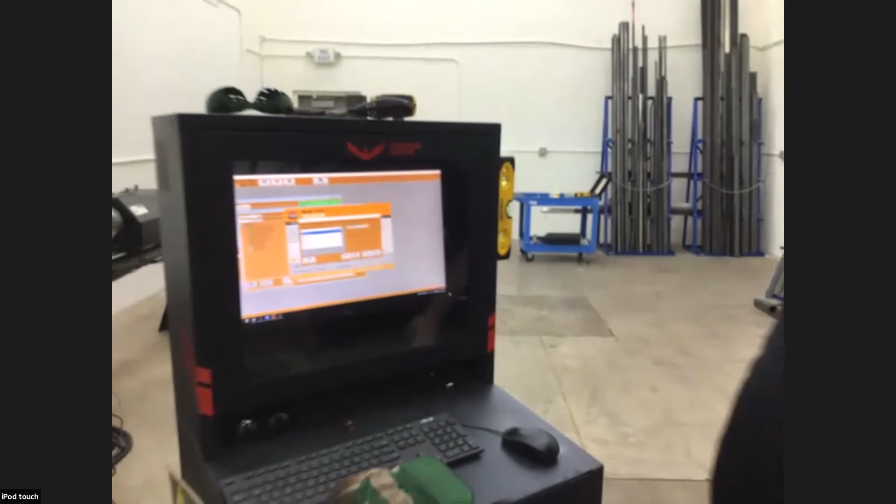Okay, thank you. Here we have: are these stepper motors or servo motors? So we do use stepper motors. They're US made. And one of the reasons we use that is because the load changes when you put a full tube in and as it processes, where servos would have to be tuned, and there can be some issues there since the load does change. So we've been using steppers now for the 5 years since we've had Dragon. Good quality motors, and yeah, they do the job wonderfully. We don't have any issues with them.

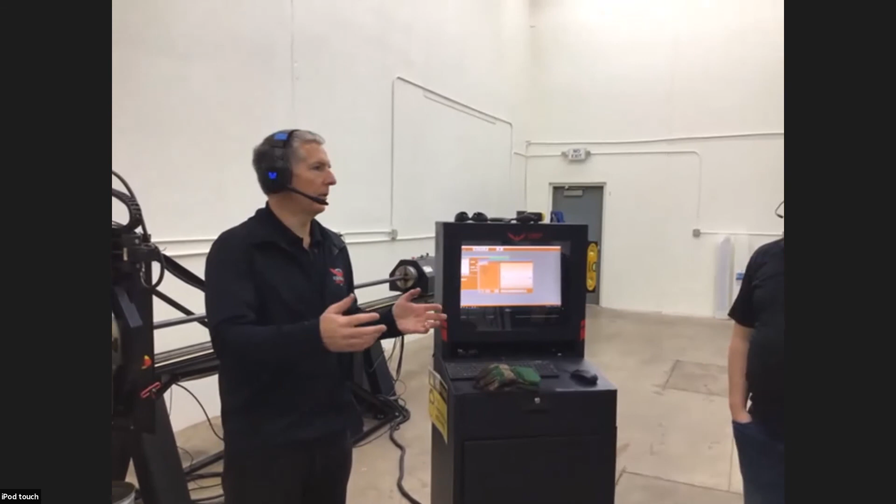Okay, thank you. Next is: what is the process for labeling each part? So Jared, if you were to import, it will put a number on those parts, right? Or if it's drawn up with the label, you can choose that action to scribe or write on the part. So we do have auto labeling, or again, if the part has a label with it, we can write that on the part depending on how you want to name that. But it's just a function of whether you want to cut, scribe, or mark on the tube, basically.

Okay, here we have: do you have acceleration numbers for your machine? Yeah, we do have acceleration, so most of those axes are set differently, as well as your rotation. We base off material size and thickness, so that will vary somewhat based on material size. The X acceleration is anywhere between 7 to 10. Actual feed rate, you can go pretty much as low as you want, but typical would be 60 inches a minute all the way up to around 100 inches a minute.